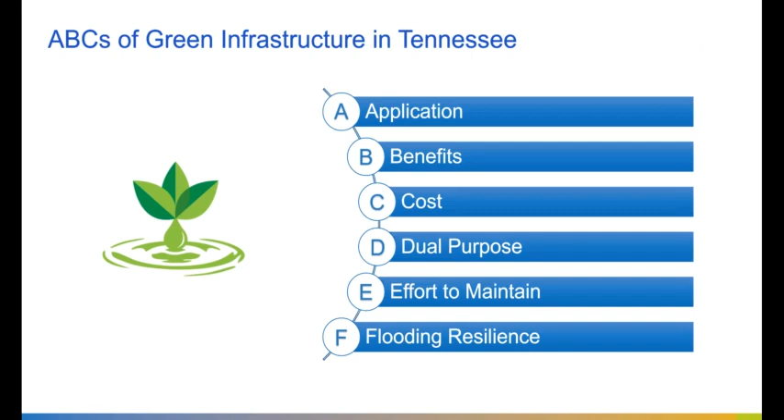And as Don said, we're going to be talking a little bit about the ABCs as well as the DEFs of green infrastructure and what that looks like and means to the stormwater professionals in Tennessee. As we go through this, I think green infrastructure is as much a state of mind in our planning and implementation of projects as it is just the specific elements that go into it.

As you see here, especially in my lifetime, we have seen stormwater evolve over the 20+ years - a lot of things have really happened. As I was thinking about this, you could almost go back 200 years. Back in the original founding, or in the first 100 years or so of this country, stormwater was basically - it came down and you just got rid of it as quickly as possible. The saying was that dilution was the solution to pollution. And that worked really good - we just put it in the rivers and lakes and estuaries and let nature take care of it.

But as more and more people kept coming and as our cities got bigger and problems got greater, all of a sudden the rivers and the lakes and the estuaries couldn't handle it anymore. Nature was overrun. Not only that, but a number of years ago, back in the 70s, believe it or not, we didn't always have computers. And when we were looking at flood control and providing detention, we were doing that graphically - we actually had to compute inflow and outflow hydrographs and do it by hand.

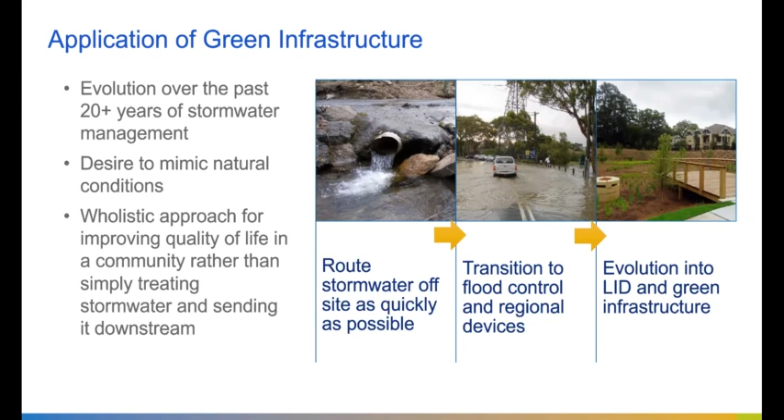As we start looking at this, green infrastructure is certainly going to be element driven. There are design components we look at when performing a site evaluation or looking in a community. This was a good project.

There used to be an old culvert that ran through town that was undersized. One of the things green infrastructure allowed was putting in this regenerative stormwater conveyance, which eliminated 250 feet of a large box culvert over a steep transitional area. It opened that up and helped control peak flows by providing some storage.

It reduces pollutant loads, especially in the low flows. Each of these bays has some infiltration capacity to put water back into the ground. More vegetation will take hold here, promoting denitrification and other benefits. But not only that, it creates a more pleasant atmosphere—a green space that provides biodiversity, and when people drive by, it's a more interesting feature to see.

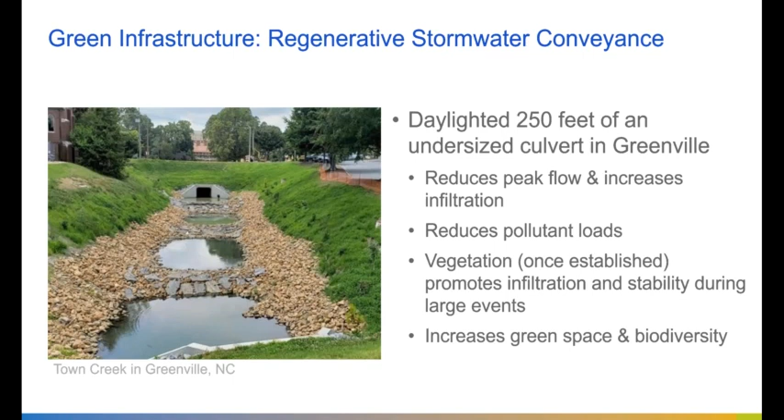Some of the things more common that most people are probably more familiar with are bioretention ponds. These certainly help provide infiltration as well as water quality benefits.

The one on the left, both of these have been recently constructed. We've had a rain event, and the water is sitting waiting to be carried down through the filter, either through an under drain and downstream or on into the groundwater system.

The one on the right is for a much smaller area. It takes some roof runoff from the building next to it as well as the sidewalks. Before this was put in, it was just a muddy, unattractive area for the library, and now it's an attraction. It definitely improves the appearance as well as providing water quality benefit and allowing that water to infiltrate down.

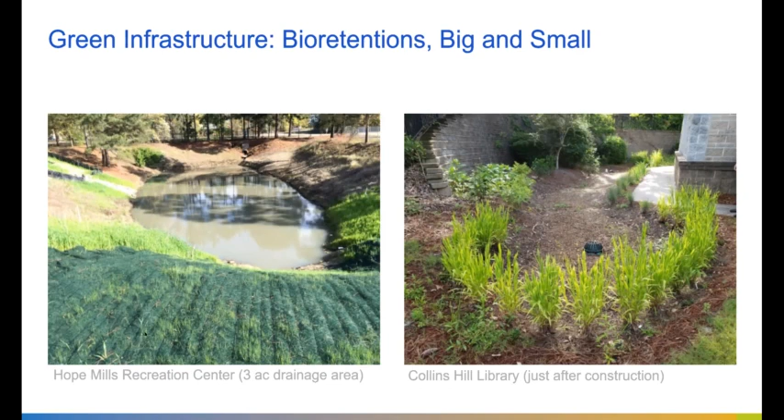Another very popular green infrastructure component is permeable pavement, and here we're showing permeable pavers. These are a little more expensive, but when you put these in, you allow for infiltration into the stone base below. The amount of storage you get is really dependent on how much gravel, the depth of that gravel underneath it, as well as the infiltration.

It's a very flexible tool that you can use in parking lots or downtown settings. You can also go with permeable concrete or permeable asphalt by controlling the aggregate size. Both of those are cheaper, but certainly not as attractive as the pavers. This is a really nice feature for downtown areas, sidewalks, and around parking lots.

We have several of those applications in the city of Chattanooga. Yeah, I know the city of Atlanta has paved whole roadways using this, with 3 or 4 feet deep of gravel to help control volume. They have a combined sewer, and instead of digging all that up to switch that out, they found that installing things like this not only improved the neighborhoods but saved a lot of money compared to replacing combined sewers.

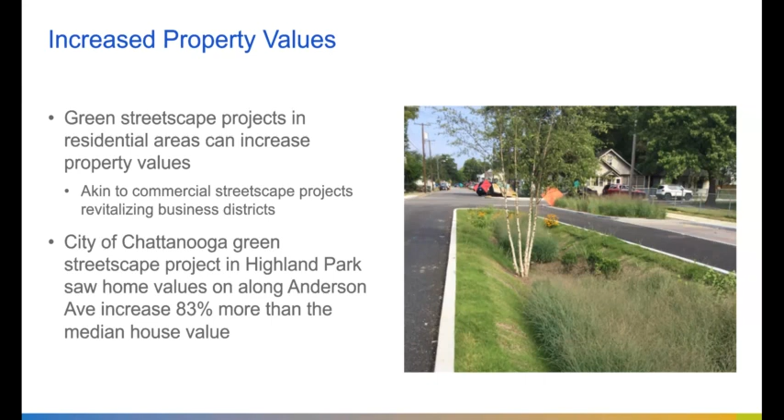This is another tricky thing that gets hard to quantify, but luckily someone has done it for us. A study a few years ago packaged this together as the ecological restoration industry, which includes anybody involved in ecological projects, anything that goes towards improving ecosystem health. It's very broad, but that's the best way they could encompass everyone involved in our line of work.

So what they found was they categorized it into direct and indirect impacts. I think most of us on the call are included in the direct impacts - scientists, engineers, planners, contractors, construction firms, nurseries that grow the vegetation for our projects. They found our industry employs about 126,000 people each year and contributes 9.5 billion to the US economy, which is great.

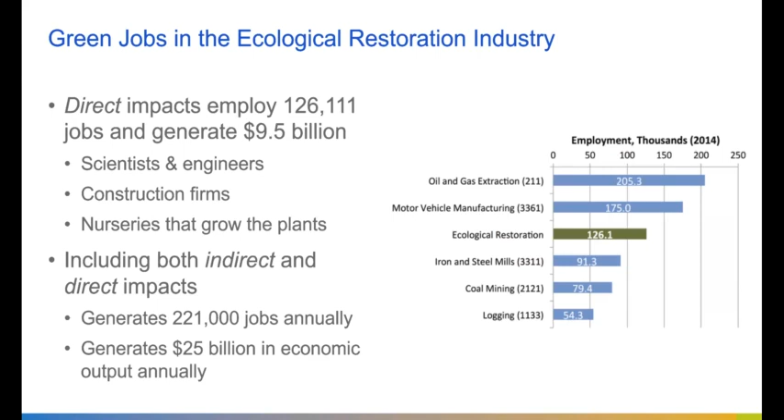And then when you look at the indirect impacts, that makes our numbers even stronger. Indirect includes more of the background support that goes into our projects beyond the engineers, contractors, and landscapers. The graphic in that study shows that folks in our field have even more people employed than the iron and steel industry, coal mining, and logging. I think that's really great to see.

Even more so, green infrastructure requires specialized knowledge for landscape firms to maintain, like a retention pond. So that's going to develop even more green jobs for companies that maybe don't even exist yet. I think that's very important.

Yeah, and so you're right. What I saw in North Carolina was as more and more stormwater regulations came into place and more SCMs were being built, there were more landscaping companies transitioning or specializing into pond maintenance, wetland maintenance. That was a specialized field that was growing in North Carolina, so I see that transitioning into our state as our programs evolve.

The next thing I want to highlight is the triple bottom line approach. Environmental justice is a relatively new term that focuses on encompassing environmental, economic, and social benefits. When those three items converge into the middle of your Venn diagram, you get that sweet spot of improved quality of life. That just means where you live should not determine whether or not you have access to clean drinking water or clean waterways. We'll see this little image pop up a couple times in our talk - I had fun creating that.

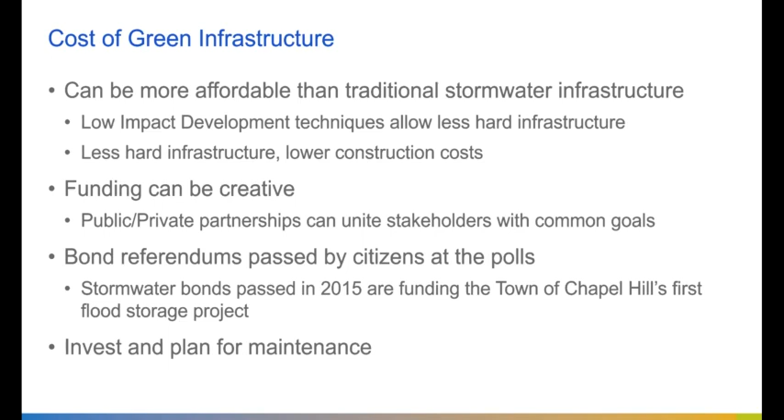It's difficult to find hard numbers comparing traditional development versus low impact development, mainly because nobody wants to design things twice. There is a study, a few years old, that highlights a handful of developments in the US and also randomly a handful from New Zealand. I think two people were buddies and knew each other and decided to do a paper together.

In this paper, 5 US developments were looked at. For each development, it was a side-by-side study comparing traditional development versus designing it for low impact development, where they clustered the homes together, reduced site disturbance, tried to preserve natural areas, and reduced impervious surface—a lot of the traditional low impact development techniques we've come to love and use all the time.

They were able to document through their construction cost estimates a reduction of 43% in construction costs. I think that's really powerful and does a great job of illustrating how when you reduce those hard structures, you can reduce your costs.

One thing I thought was great from these studies is that for these developments, they basically took out these big wet ponds that would take home lots and footprints away, and they were able to keep those residential lots. Instead of having wet ponds, they were able to preserve the forest area, and I view that as a nicer amenity. But anyway, that was a great study.

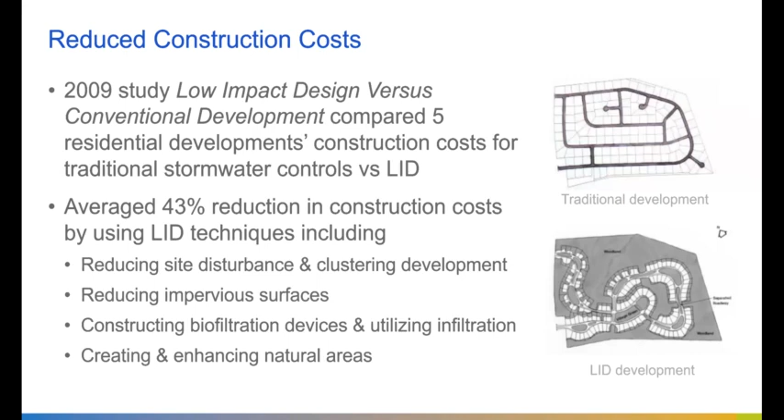Unfortunately, it was all on private property, so they had to coordinate with these private property owners. One of the owners wanted to build an apartment building right next to the project site. So the way they figured out to best streamline the project and move it along and coordinate all the different elements was to do them together—basically planning the flood storage project along with the apartment building project.

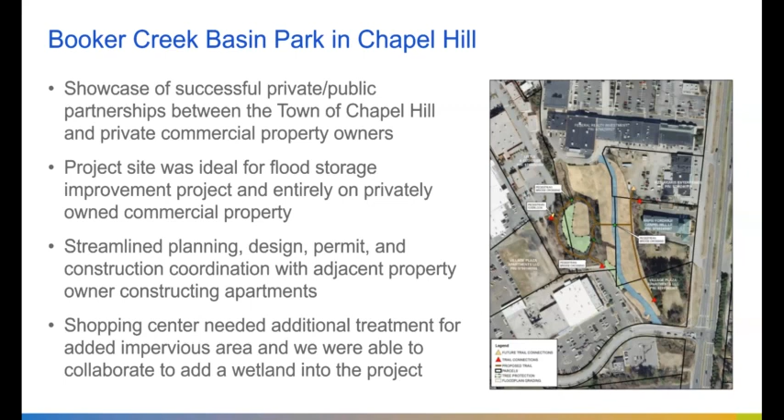In Chattanooga, we had 2 projects that were public-private partnerships involving permeable pavers. One was next to the Chattanooga Choo Choo, and one was near the Flying Squirrel, a really good restaurant and bar. In front of both of those, we did a public-private partnership where they wanted to pave the area, but we worked with them to do permeable pavers instead. I've been over to that one, and it looks fantastic—it was a really good job.

Again, it's the town's first flood storage project. They're doing a great job of weaving together social elements with the project.

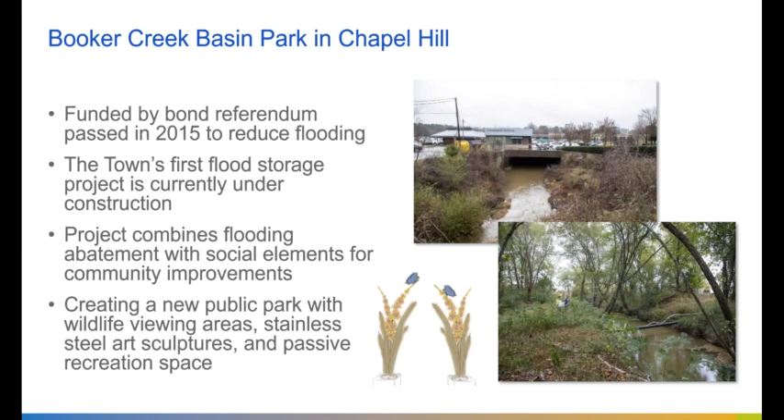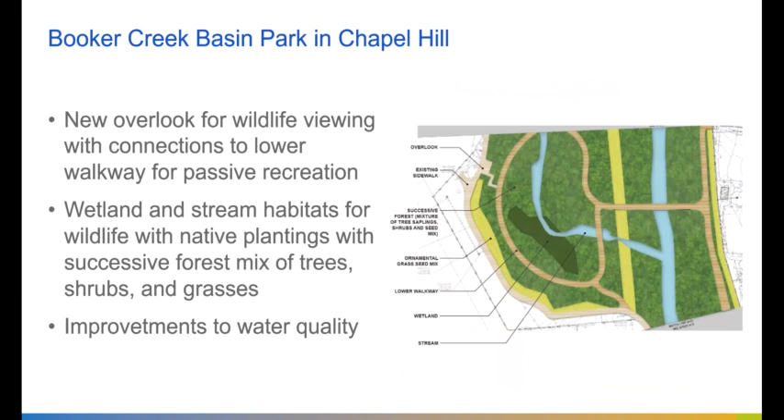They've added in walkways for passive recreation, and an overlook so they can bring people into the experience through the wetland and stream habitat. They've got an intensive landscaping plan to try to develop a successive forest over time, along with improvements to water quality.

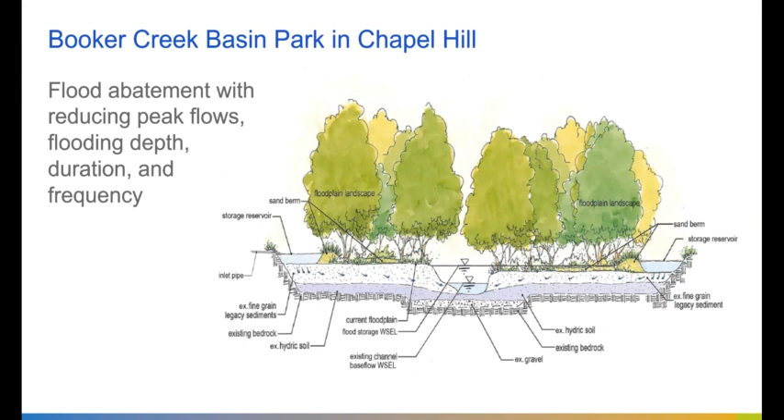This next one is a cross section that shows how they're trying to reconnect to the floodplain from where it should naturally be, without all the commercial development surrounding it. I think that's it for that one.

So I'm going to pass it back over to David to walk us through the dual purpose. You mentioned a little bit about dual purpose, but that is an important part of green infrastructure. You get the stormwater management side, but we also improve our communities.

We get pollutant removal and definitely runoff volume reduction through infiltration, which also helps remove the pollutants. We're reducing peak runoff, the flood abatement. Anytime you can infiltrate or store water, you're reducing those downstream impacts.

And that's one thing in nature - if you've got even a forest, when you get enough rainfall, it all runs off. But the forest is so important because it traps those first few inches and helps slow that runoff down. The increased infiltration is also important to groundwater.

Then you get the quality of life we've talked about - the community development side, you create wildlife habitat. It's amazing, I see deer and rabbits and coyotes and all kinds of things in my yard. Years ago you would never see that, but the wildlife will come back when you have places for them.

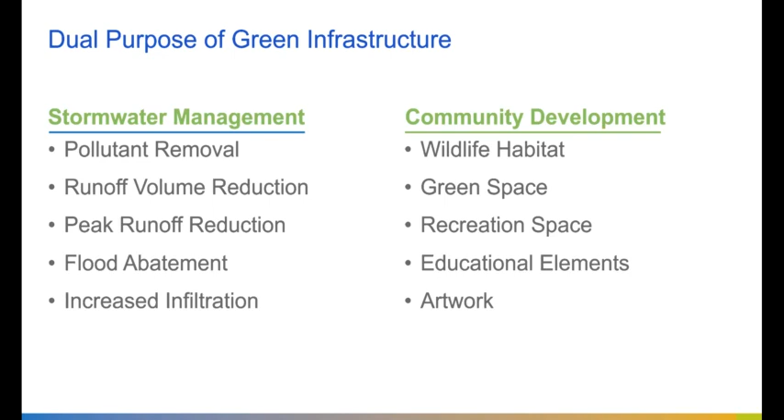But they also wanted to create educational opportunities for the patrons, especially at the library. You have a lot of school children coming here on field trips. They wanted to have a little amphitheater, which has the focus of the bioretention pond, so they could do some presentations to the kids.

In the COVID world, these outdoor amphitheaters are pretty good - you can socially distance and have some free UV treatment. This is certainly a benefit to green infrastructure.

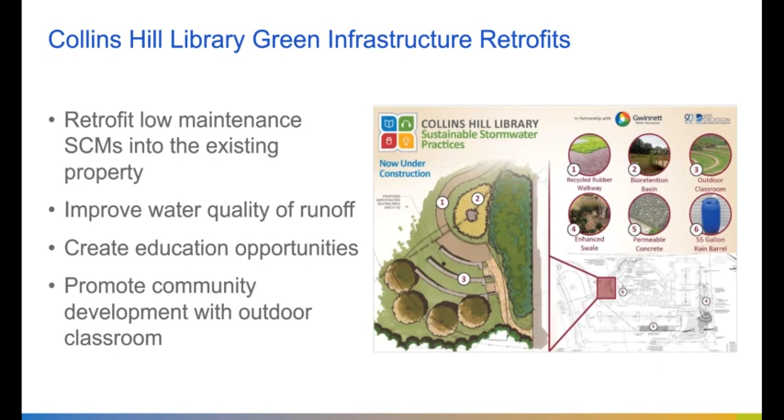Some of the items they were looking at putting in at the site - they had a pretty significant drop coming off the parking lot down into their existing detention pond. The regenerative stormwater conveyance provides a good way to step down the water. Especially since this was kind of an eroded area, it takes advantage of existing stream beds and topography to be able to fill that in with filter media.

The rocks - they chose to use riprap because it was much less expensive than just large sandstone blocks and river stones you might see in some designs, but you can still have basically the same components. Then you have the sand filter underneath this that provides water quality benefits as well as promoting infiltration.

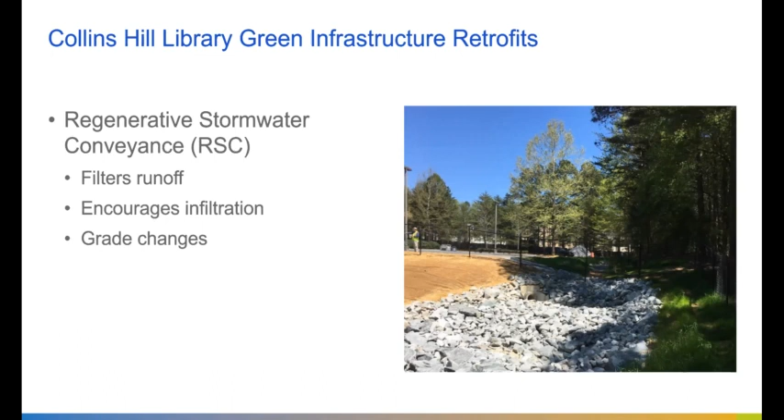Of course, the bioretention area - this is the little amphitheater area you saw on the poster a couple of slides back. You can see it here as it looks out across the bioretention pond.

One of the things they also wanted was a walking path to provide some connectivity around the green infrastructure and connect it to the existing sidewalks. So they installed a recycled rubber mulch pathway that's also permeable, so runoff passes through and infiltrates into the ground. It creates a nice little outdoor classroom, and they planted trees in the background so in the afternoon they'll have shade over this area.

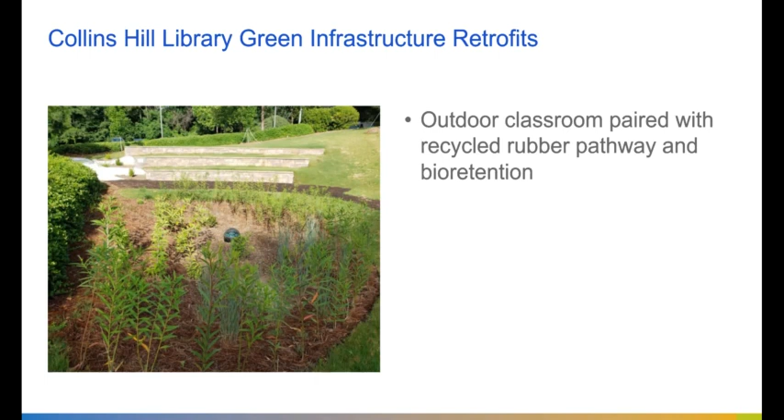Like I said at the beginning, when we're thinking about green infrastructure and low impact development, it is a state of mind. As engineers, we're trained to follow a flow path and go through a checklist when designing things. Well, with green infrastructure and low impact development, it's a similar type of thing, but as you think through these processes, you have to expand your palette a little and think about plants, sunshine, and all these other things that go into it. But it can create a really nice feature that provides that dual impact of water quality and quality of life as well.

This photograph is interesting. We talked about not showing it, but it is a valuable lesson learned. This is an enhanced swale. You can see the parking lot to the left, and there was an existing tree island with the oak tree coming up out of it. Basically we designed the enhanced swale, and instead of having the catch basins, there were about three single wing catch basins up through the parking lot. Those were capped, and flumes were put in to carry the water off the parking lot into the enhanced swale.

During construction, one of the concerns was the potential for erosion before the selected vegetation took over, and the contractor put some ryegrass out there but didn't really do anything to maintain it. So it got several feet tall, and as it died, it covered up all the plants we were hoping to keep, which created a bit of a maintenance issue.

Don will talk more about maintenance in just a minute, but this is a very nice feature because especially in the summertime, you get a nice thunderstorm, the pavement is a hundred and something degrees, that water washes across there, and instead of going down into the stream, it now goes into this nice vegetated swale. It has a chance to infiltrate through the bottom filter, and instead of getting a large slug of very hot water, you're absorbing most of that and protecting the fish and wildlife downstream.

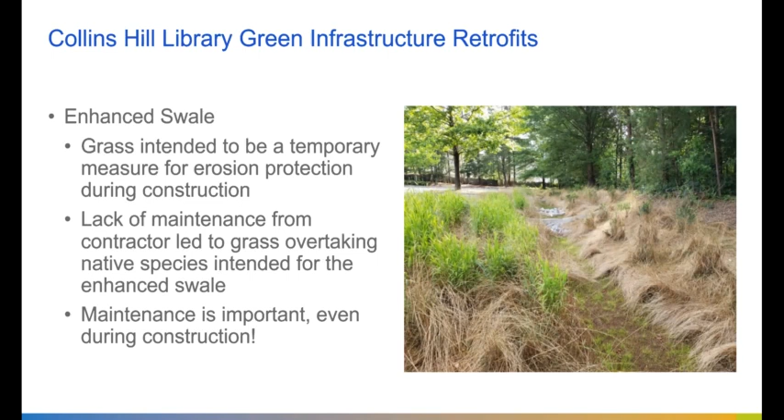And Don, I'll turn it over to you.

You want to do another poll question, Charlene? Yeah, let's do our next poll question. We always want to know what people are thinking and what people are trying to do. Trying to remember how... oh okay, trying to remember how to get to the next one. It's been a while, sorry about that.

Here we go. Has your MS4 already implemented some green infrastructure projects? No, but we want to; yes; or it is not a current priority.

We need some background music. I'm going to put yes myself, even though I don't belong to an MS4 anymore. Dun, dun, dun, dun, dun, dun, dun. Time's up. There we are.

63% said yes, wow, that's great. And some said it's not a current priority. We'll see, the new regulations hopefully will come out in our lifetime, and we'll see how that changes things, because that will be a number one choice for post-construction. I think it's promising - what we've seen in the first two polls is that there already is support for green infrastructure among staff, and it's beginning to be implemented. So it's a large learning curve.

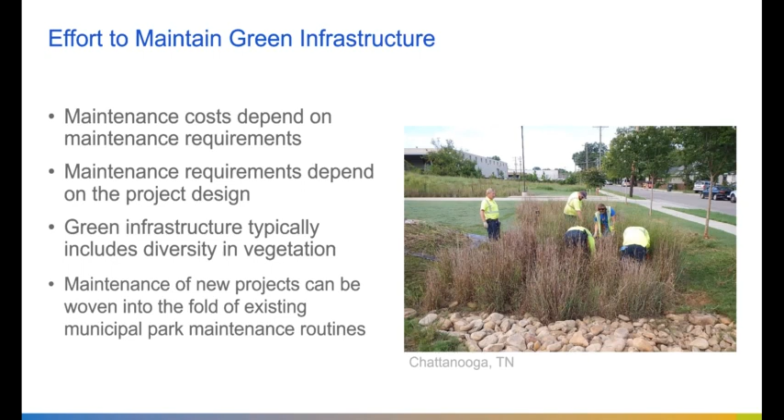This is a great card we developed for Gwinnett to include with your palette, include with the design. You can go out on the site and pull this up on your iPad or a laminated card, and see the plants. You can say, okay, these are the ones that are supposed to be out there, the rest may be invasives, so these are the ones we want to keep. Here's the design of it, here's how it's put in. This is a really good document you can put in your manual, or on iPads, or take out as a laminated card with you, to look at sites for maintenance.

Before I left Chattanooga, we were working on developing a whole palette of plants for green infrastructure, because plants are the key to green infrastructure, in my opinion, especially for biofiltration and green roofs. Mulch is there, but mulch doesn't really do much of anything, in my opinion. So you want the plants, the native vegetation, because of all the different things native vegetation will do for you. This is a very good opportunity to have something like this.

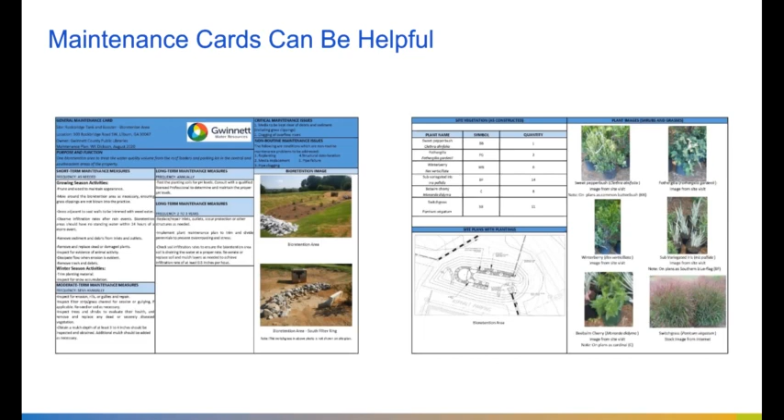Next slide. Operation and maintenance plan - if you are MS4, you know you're required to do an operation and maintenance plan for all your facilities. So to do one for green infrastructure is very important. Are you going to have staff to do it?

These green infrastructure sites are not just a detention pond over the back 40 that you don't want anybody to see. These are practices you bring people to see. We've had countless people from all over the country come see the Anderson Avenue retrofit project that we put out. It's a very good education site for water quality, not just green infrastructure, or to coordinate with conferences. We've had people from Georgia, North Carolina, South Carolina, and everywhere come see the Anderson Avenue retrofit project. If you're ever there, go see Josh Rogers and he'll take you and show you all about it.

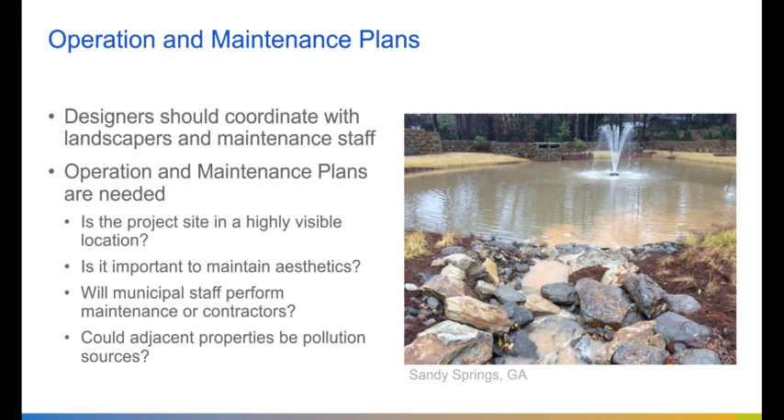And yeah, thank you. See this guy on the right? Do not do that. This is Anderson Avenue, and the design of this could have been a little bit different, but he should not be trying to mow that. We designed it with long grass that's wanting to infiltrate into the bottom where the native vegetation is, and we designed it too steep to actually mow. So you learn from your mistakes, and this was a sort of mistake.

So this needs to be retrofitted. We were thinking about retrofitting this before I left.

How do you plan to maintain steep slopes? Good question, and the design informs what you maintain. So make sure that when you are designing these, do not do as we do, but do as we say. Select the plants carefully. You could put grass on the side of these slopes, but make sure they're easy to maintain, and make sure you have a definition, because grass grows where it wants to and can take over the place.

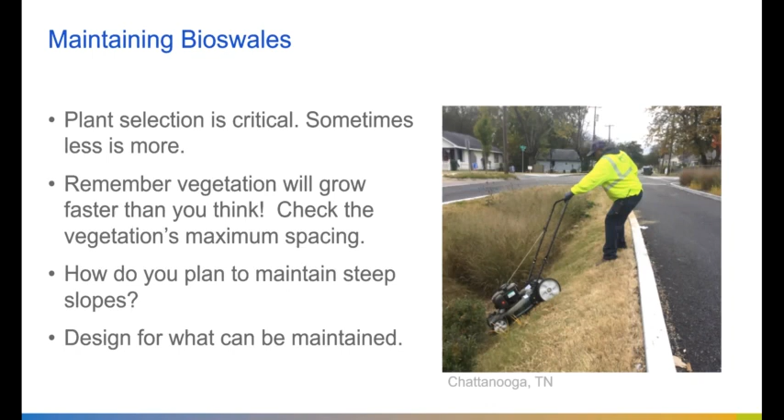Josh is the big pusher on this. We did a test of the infiltration for this parking lot at the football field, and it just did not infiltrate at all—the water just stood there. So Alan brought his machinery out, and we did a workshop. It took him a long time, but all he did was clean one stall, and it brought back the infiltration of this pervious concrete. Not 100%, but close. So it was a remedial effort he made, and it took a long time. If you had to do it for the whole parking lot, it'd be very expensive.

So it's best to keep it maintained, best to keep it swept—maintain it. A stitch in time saves nine. We couldn't afford to do the whole parking lot, but it can be done, and it restored the functionality to the parking areas where he did his little work. It took him a long time, but make sure you maintain it so you won't have to spend a lot of money to bring it back. Not just pervious pavement, but all your practices, especially vegetation, because once you start getting invasives in your native vegetation, it's hard to get out. So keep it maintained.

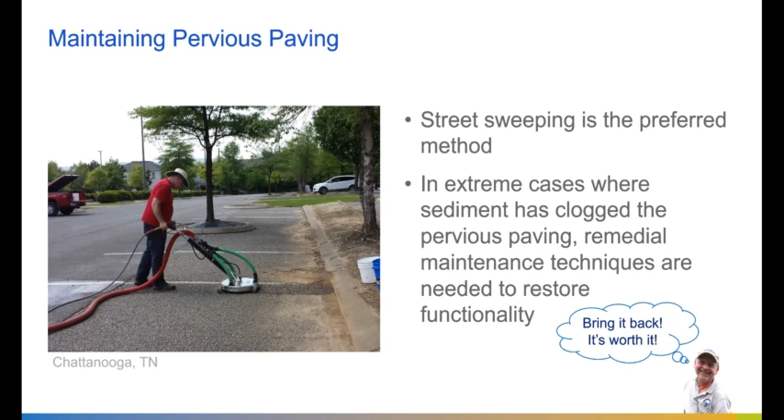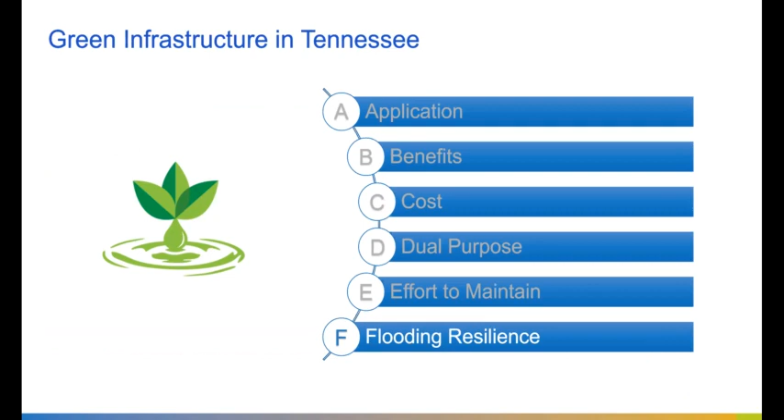Right. I guess that comes back to me. Comes back to you, David. We will talk about flooding resilience, and that'll pretty well wrap up our talk here.

When you think about green infrastructure, we are trying to mimic nature. We're trying to infiltrate runoff. We're trying to limit impervious area and create pervious area. So all of that goes hand in hand in reducing flooding by reducing the amount of runoff from a site.

Some of the things that become really important are master planning and watershed planning. When we look at a city or county area and break it out into different drainage areas, we study those areas, and it helps us better understand what's going on and what the impacts are to our downstream channels and things.

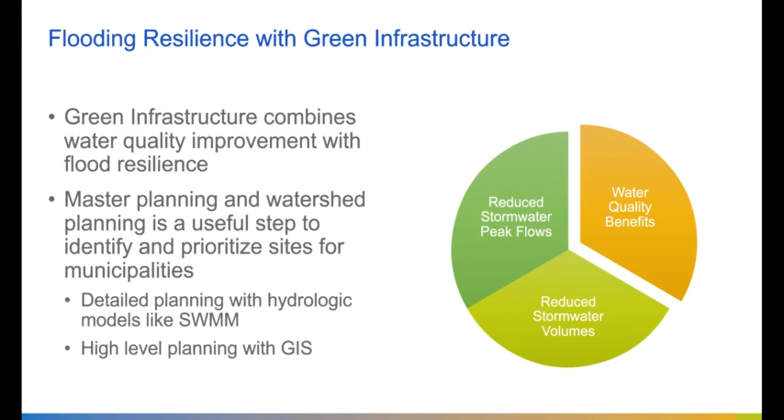I think one of the things that, especially as regulations change, redevelopment becomes a very key element in restoring communities and drainage areas—because if you're 90% developed, you're not going to solve anything just beating up the last 10% of the developers. But if you can go back over time and correct the errors of the previous 90%, you can start making significant differences. That's all part of planning, looking at watersheds as a whole, and picking out where we can make improvements that will have the ultimate benefits.

So that's a lot of harm to go back and try to correct. But one of the things that when they did their watershed study, this popped up is, hey, if you can put an SCM here, you can have a pretty major impact on an impaired stream downstream.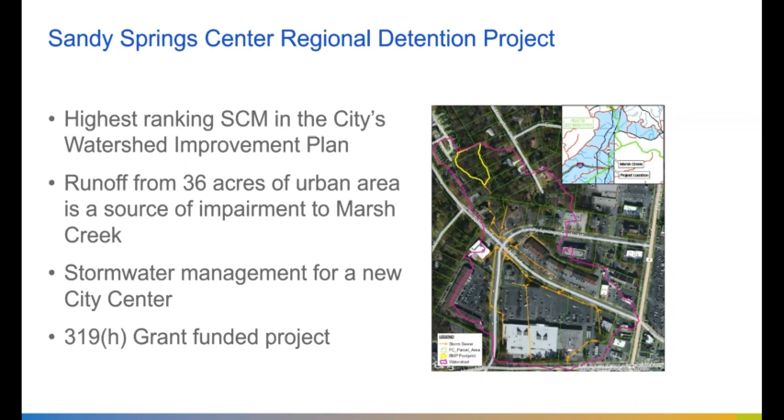Also, it just so happened that the city was a new city and they were looking to build a city center, so they would have an identity. And because it was going to be redevelopment, they were going to have to do some type of stormwater control as it was. So they were able to combine this and get that dual aspect of not only providing controls for a large area and improving an impaired stream, but also providing something that was going to be required anyway to develop that city center. As a bonus, they got a little over $400,000 in a 319(h) grant, which really helped the project.

In this project, not only this one, but other types of projects you're going to be looking at with green infrastructure, again, it's just thinking about not only how the element is going to perform what you're trying to do, but also what are some of the benefits you can get out of it. What are some of those win-win type of situations you can have?

For this project, they had to do stormwater detention with water quality components. A lot of that was driven in the grant application, that they had a downstream that used to be, I'm sure, a very nice mountain looking stream, and now it was a huge, deep U-shaped channel with banks 8 to 10 feet high, and just an eroded mess down through there. So controlling stormwater is really important.

The project was really broken out into several components. The initial part was a large bioretention area, which took water from pretty much the entire 36-acre drainage area. And then that would filter through and wind up into the permanent pool, which also provided some water quality benefits. And then the entire site could be filled.

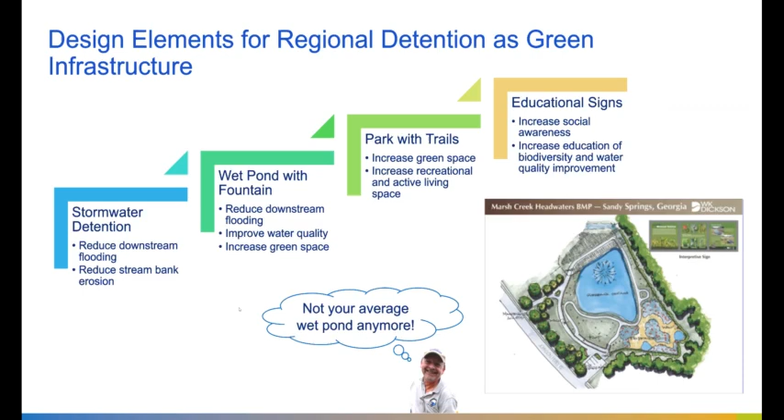And here's just a picture of the site. You can see it's a very peaceful place. The fountain provides turnover in the water. It's not just a nice aesthetic thing, but that's one of the elements that helps turn the water over.

Keep it oxygenated. We talk about nature sometimes, and Don had mentioned the number of plants. Sometimes you plant your pallet of plants selected for the site, and nature has its own ideas. A lot of cattails and other things popped up out here out of nowhere - where did they come from? The lake filled up with fish. There is no stream upstream of this, it was dry, and now there's fish all over.

It's probably the mayor's fault because he wanted to be able to go fishing at lunchtime. But these things create really nice quality of life components. So that's that dual benefit.

And even this is more than a dual benefit, because you're getting the water, the flood control, you're getting water quality, but you're also providing a very nice park setting for people to get out, especially at lunchtime, leave City Hall, come down here, have your lunch. It's a really nice facility.

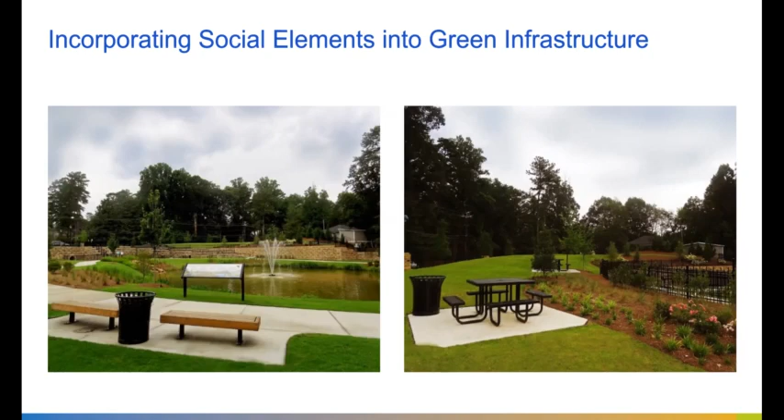We talked about increased property values. They used to have kind of a real trashy wooded area filled with lots of plastic bottles and trash, and now they have a very beautiful feature in their back door that becomes an asset. So it definitely helped their property values.